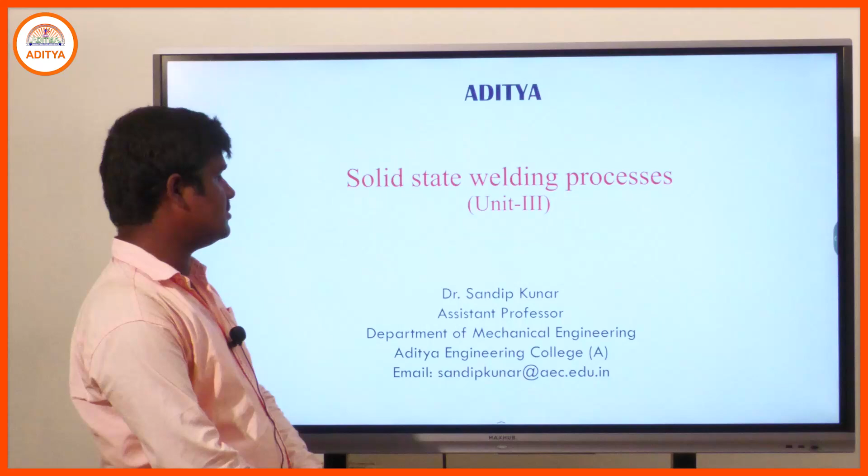Good afternoon to all. Today I will discuss about solid state welding process. Now I will discuss resistance welding.

In case of resistance welding, that is the very oldest method of the electric welding process, and that is also used in case of manufacturing industry. That welding process generally is made of a combination of heat,

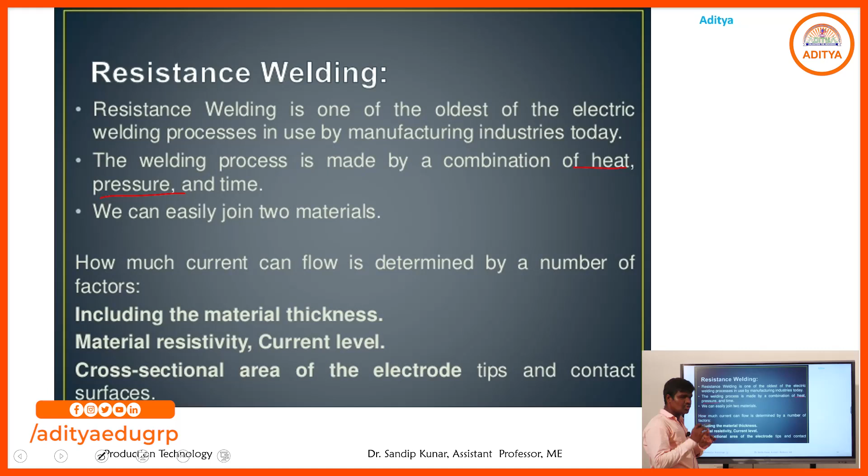pressure and time. In that welding process we provide the power supply, and due to providing the power supply to the workpiece and electrode, heat will be generated, and due to heating, the melting portion of that weld face will sometimes be melted, and due to melting we provide the pressure, and due to pressure both the weld faces will be joined. In that process we can easily join two materials.

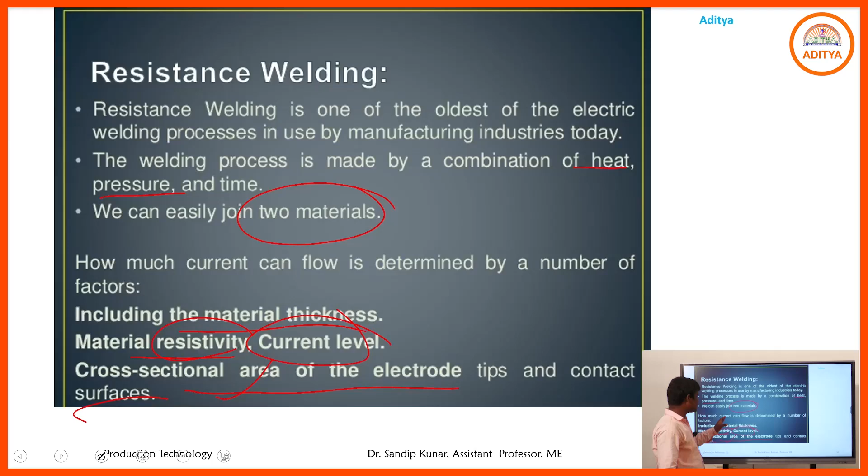How much current will be determined by a number of factors. The current provided in that welding process depends upon the material thickness, material resistivity, current level and cross sectional area of the electrode tips and contact surface. Based on those factors we decide how much current will flow.

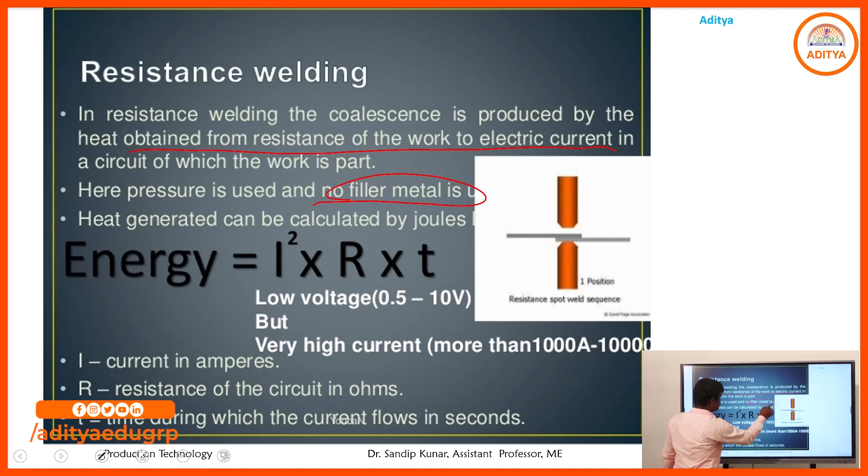will be calculated by Joule's formula. Energy H equals I square R T, where I means flowing current, R means resistance, and T means time during which the current flows, in seconds.

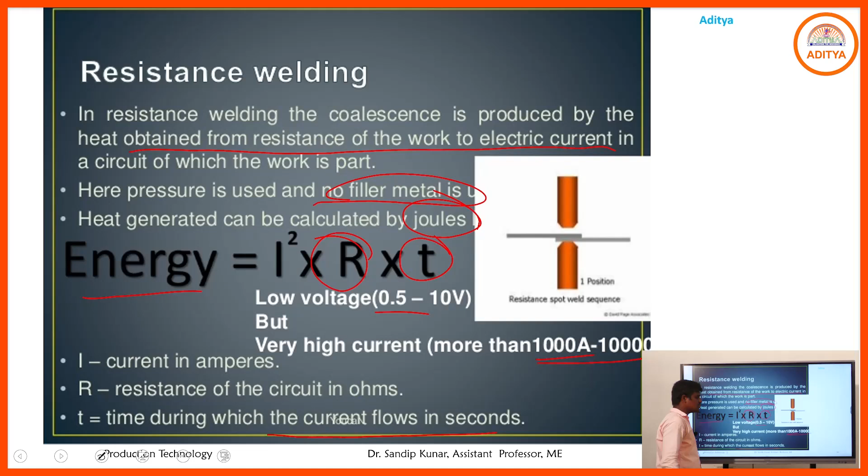Very high current of about 1000 to 10,000 ampere is used, and voltage of 0.5 to 10 volt is used in that process.

In resistance welding, metals having higher thermal conductivity are difficult to weld. Some metals have higher thermal conductivity, so in those cases it is very difficult to weld using that welding process, due to higher heat concentration on them, such as aluminium and copper.

The strength of the weld depends upon the surface roughness and cleanliness of the metal surface. The quality of the weld generated using resistance welding depends upon the surface roughness of the weld faces and the cleanliness of the weld surface. Before welding we remove oil films, paint, and oxide layers, because if those things are present on the weld face, the quality of the weld after welding deteriorates.

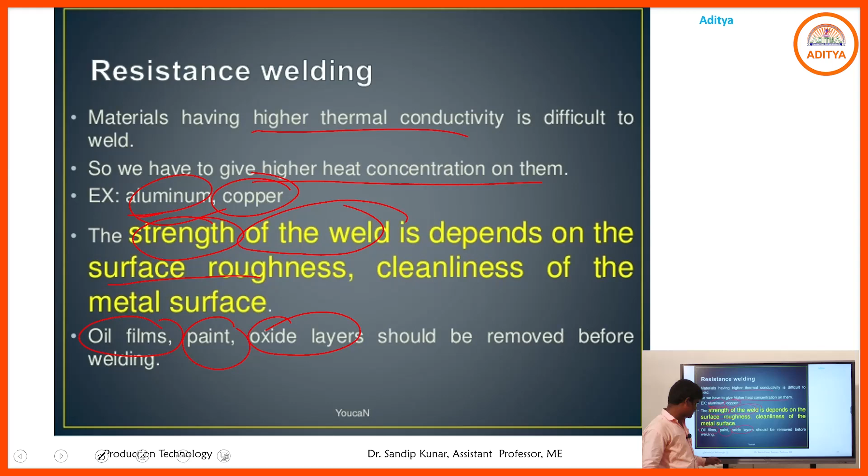Resistance spot welding. What happens in that welding process? Two bar type metal electrodes apply pressure, and two bar type metal plates are kept. Near about pressure we give 2 kilonewton, and electric current is passed through the two electrodes. The surface area of the metal in the center is more highly heated, so it becomes a plastic state, and then the current switches off, pressure is applied, and the weld spot or nugget solidifies.

Here both the metals are present, and the electrodes are connected to the transformer. Using that transformer we provide current to the electrodes. After certain time we apply force and then switch on the current. After certain time, at the melting portion very high heat is generated, and due to that heat, a molten state is generated between the plates. Due to applying pressure, both metal plates are joined. This creates the weld nugget.

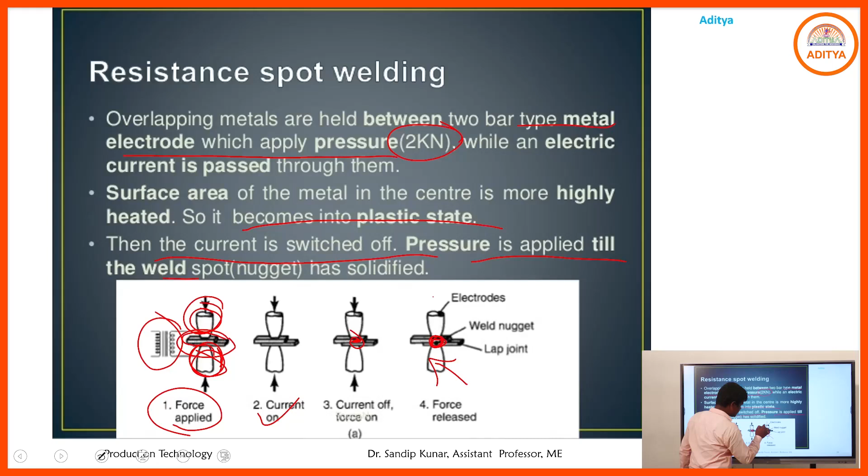That is one type of lap joint, with both electrodes. After joining, we release the force. Now that is the resistance spot welding process. We see the electrode, upper electrode, and lower electrode, and using those electrodes we apply pressure. Both electrodes are supplied with cooling water for controlling the temperature.

That is the workpiece, and due to the power supply unit supplying power to both electrodes, the melting surface of the plate creates the nugget zone, meaning a molten state is created. Due to creation of the molten state and applying pressure, both plates are joined across this surface.

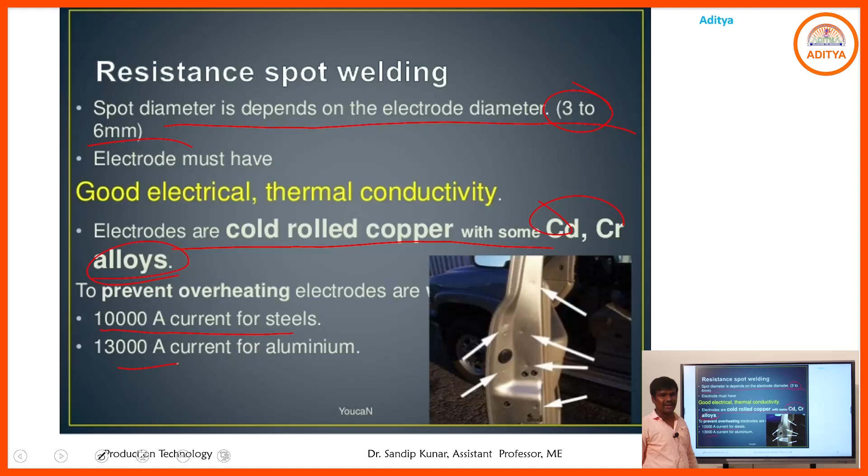In resistance spot welding, spot diameter depends on the electrode diameter, varying from 3 to 6 mm, and the electrode must have good electrical and thermal conductivity so heat is properly conducted to the workpiece plate. Electrodes are cold rolled copper mixed with some cadmium chromium alloy. To prevent overheating, sometimes we use cooling water. 10,000 amperes current is applied in case of steel, and 13,000 amperes in case of aluminium.

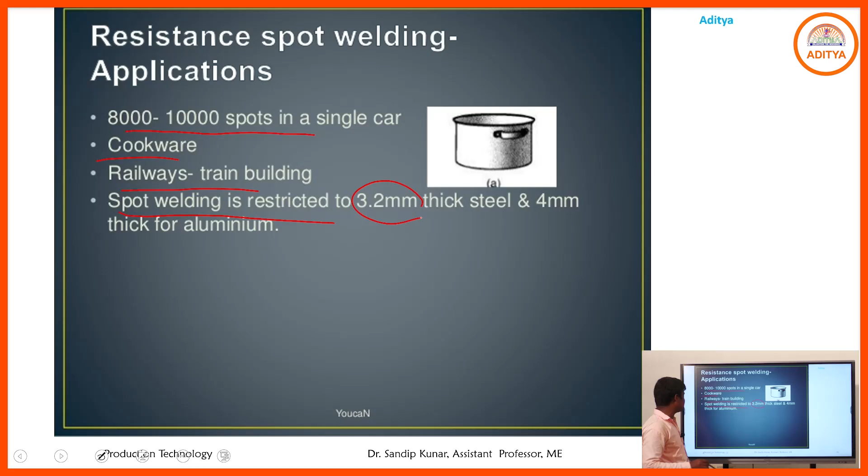Resistance spot welding applications: generally 8,000 to 10,000 spots are used in a single car, welded easily using this process. It's used for cookware and railways. Spot welding is also used to restricted 3.2 mm thick steel and up to 4 mm maximum thick aluminium plate, or 3.2 mm thick steel and 4 mm thick aluminium.

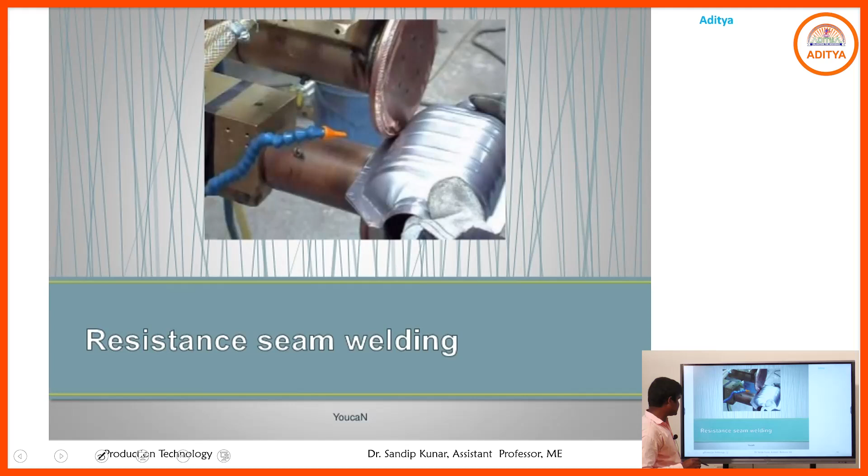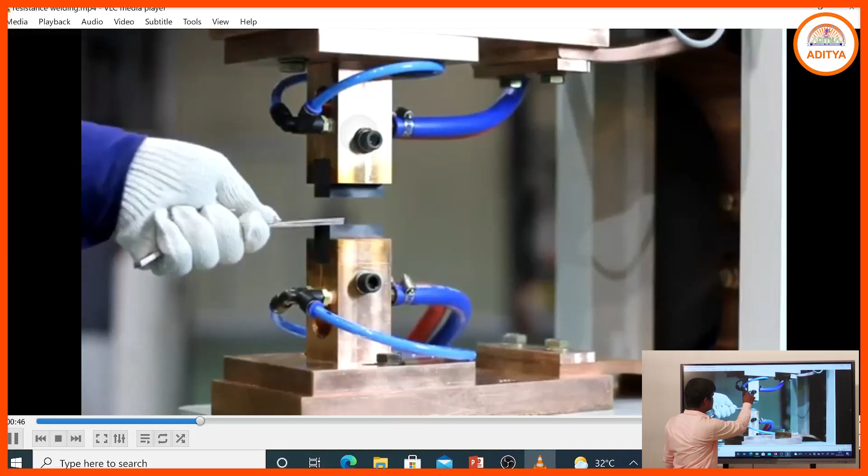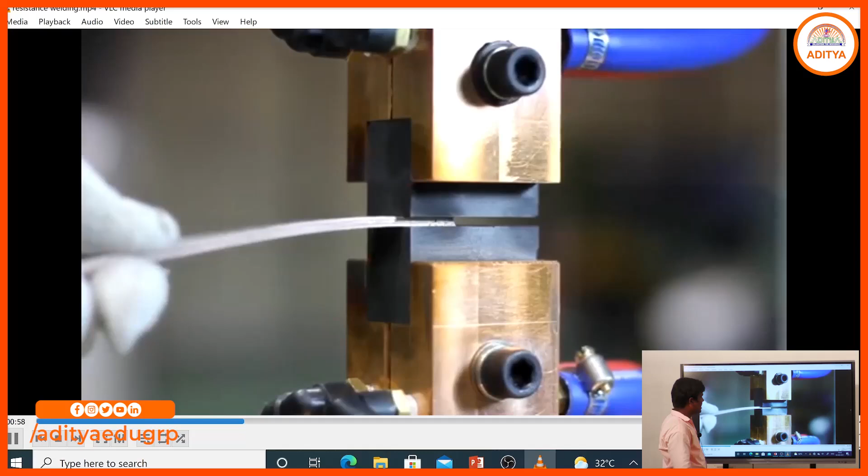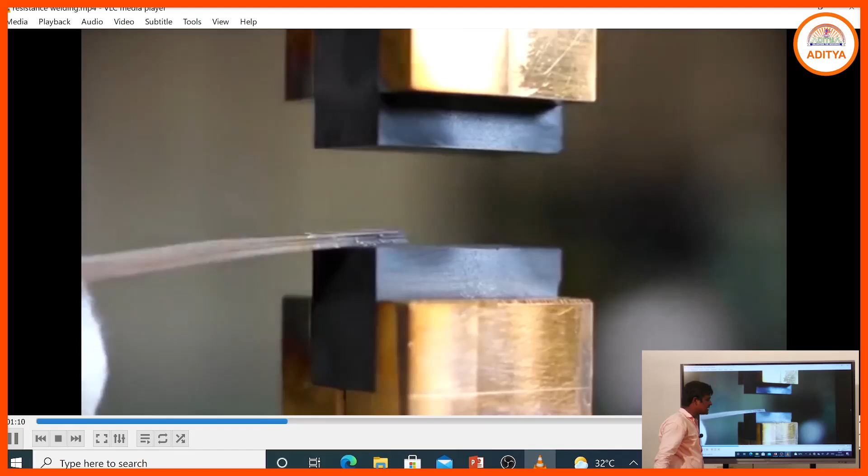That is resistance seam welding. In this process we see both electrodes automatically controlled by a numerical control device, computer numerical control device. A bunch of plates is kept, and using the upper electrode it gives pressure on that bunch of plates. When pressure is applied, that portion converts into a molten state, and due to the molten state and applied pressure, the bunch of plates is joined. That is the resistance welding.

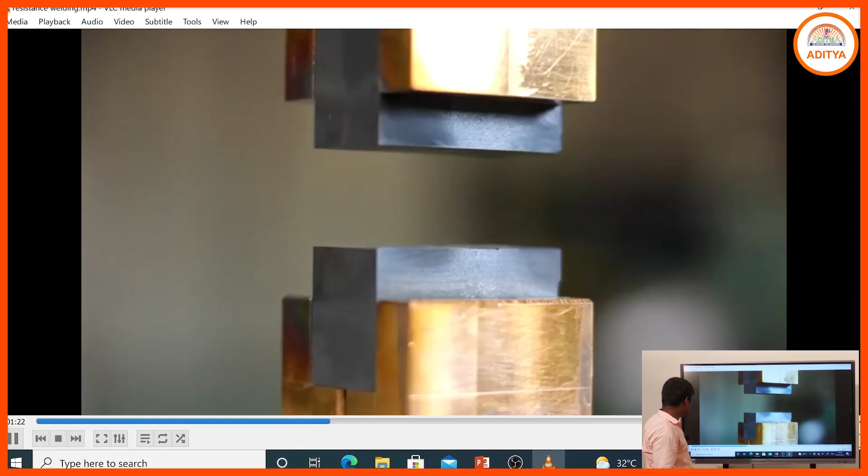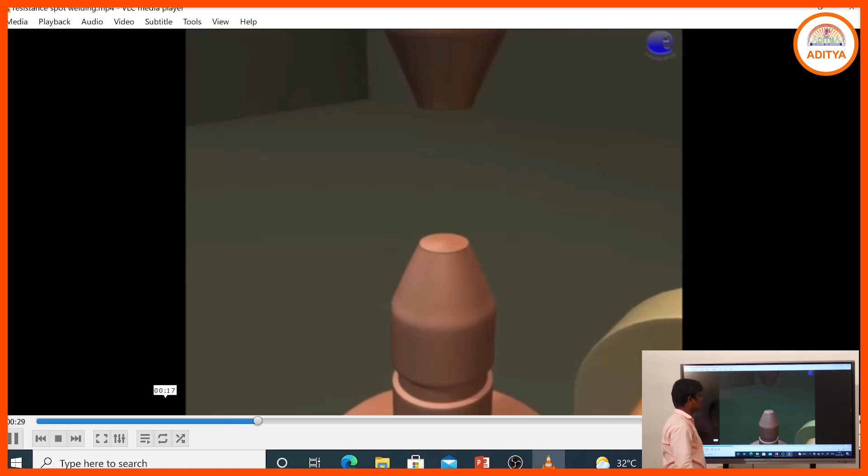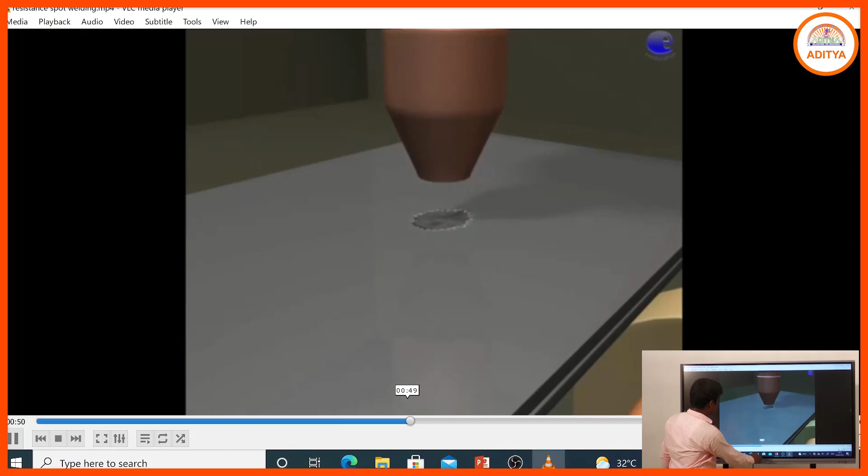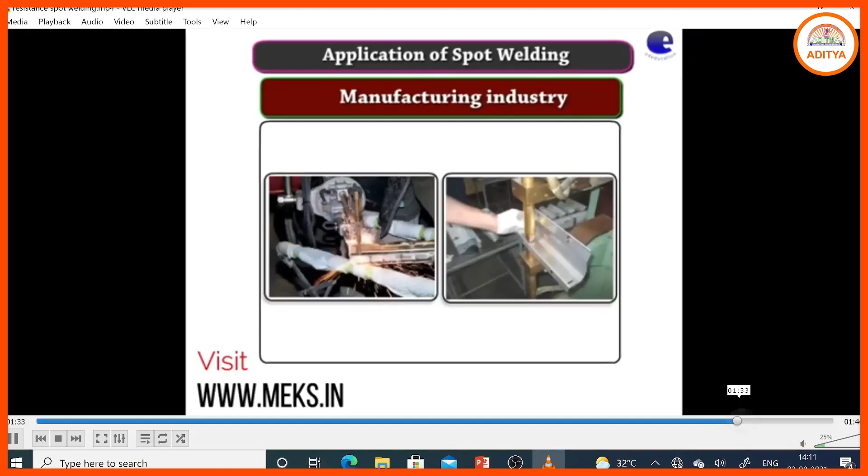That is the resistance welding. In case of resistance spot welding, both electrodes are shown in the setup, with both plates kept in place. At a particular location we join both plates, creating one spot, and in that spot both plates are joined. Using both electrodes and providing power supply, a molten state is generated at that portion, and due to generation of the molten state, the weld faces are joined.